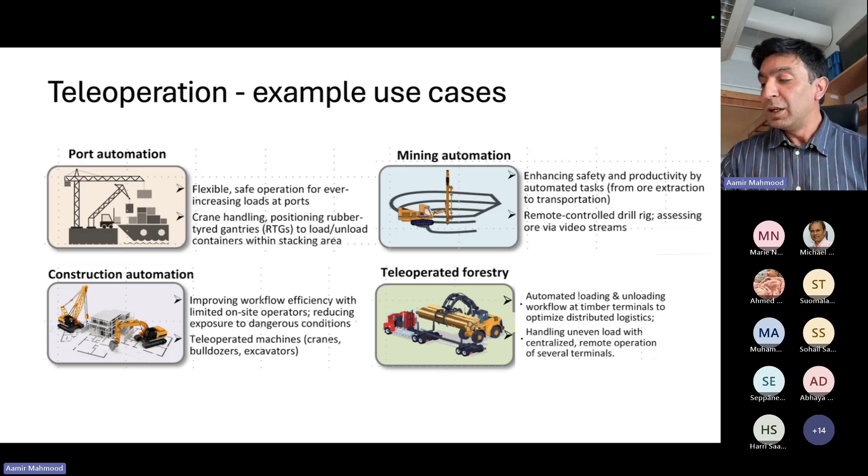And then the forest industry, it covers a wide area. So I stole this slide because SCA was the project partner. And when we're talking about why even this—

Starlink, for example, why they don't have connectivity in the northern areas. So probably what we see is that we need to advocate for the connectivity needs in these areas.

Here it shows on the left side the forest that is owned by SCA. I'm putting Sundsvall here as a reference because they own the forest in the northern part of Sweden. On the right side, it's the different operations happening because SCA owns the forest and maintains it—it's not only about cutting the wood, but also maintaining it, preparing the soil and planting new trees. All these activities are happening in the northern areas.

So in this case, where the wood is felled—they cut the wood and then it's transported to some terminal, some intermediate point where the wood is stored. Where the wood is cut, usually they have one harvesting machine and one forwarding machine that loads the raw wood onto trucks, and then it's transported to some intermediate location, which they call the timber terminal—that's where it is stored. They have around 200 sites where these actions are happening continuously.

So far it's operated manually, but in future they just want to report what logging operation is happening at this moment at this site, and get the next task—okay, now they should move to this site. So currently they are talking about coverage needs, but in future they want to automate that operation—the ability to operate the machines from a remote location, because manning these sites is always difficult and challenging.

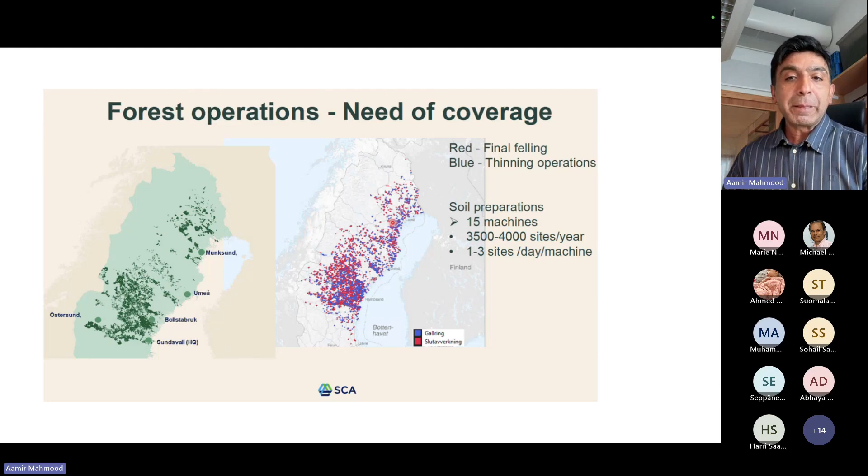In this first project, the remote timber project, we were focusing mainly on wood coming from the forest and transported. When it comes to this timber terminal, they have 15 sites in this northern part, but in general in Sweden there are more than 100 sites where timber terminals store wood before it's forwarded to the industry or factories. The objective was that when the wood arrives, these heavy wheel loaders, about 40-ton wheel loaders, would be operated from a remote location.

It's the automation of this workflow for loading and unloading. If we have one operator sitting at a remote location, they have the ability to operate four timber terminals, covering the manning needs of these terminals. Mostly they are in remote locations, so manning of these timber terminals is a bit challenging.

If we talk about the teleoperation use case, it's challenging in terms of connectivity needs, because to operate this machine you need multiple views. This machine isn't just about driving; it has to do intricate operations like handling the wood, loading and unloading, and storing it in the right place. So it's an uplink-heavy use case in terms of video transmission that the machine has to send to the operator at the remote location. Lack of connectivity infrastructure and fulfilling the demanding connectivity needs of this use case is challenging.

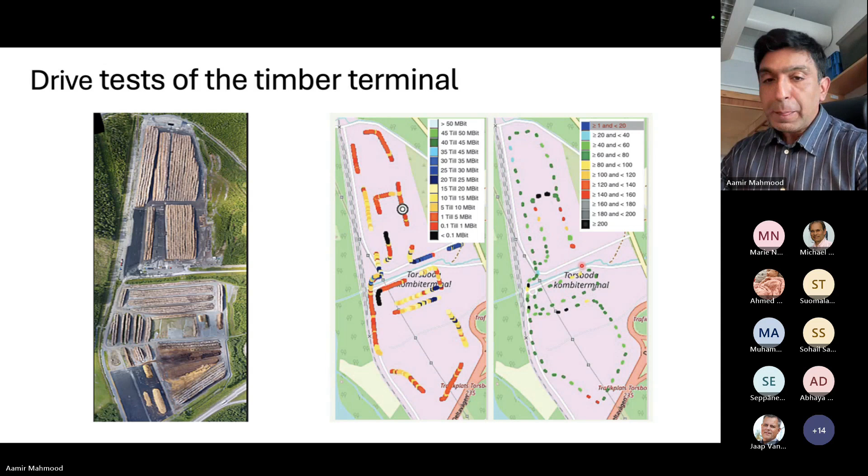So in that case, we went towards selecting a certain section within this timber terminal and installing a dedicated base station there, just to provide coverage in this area.

This was our test area where the heavy loader vehicle was operating. The operator was at the same location, but the traffic was routed through Stockholm, since the core is in Stockholm, so traffic was routed there and back to the operator. The base station was maintaining two sectors, one towards the vehicle and one towards the operator.

This is where the vehicle is operating, and the timber height could reach up to 10 to 15 meters. For the operator, this was the analysis that was done.

To have the operator work in this kind of environment, we needed to determine how many views he needs to operate this machine comfortably. There were 11 cameras installed on the vehicle, with a proprietary tool stitching all these streams together, transmitting them, and then they're received by the operator.

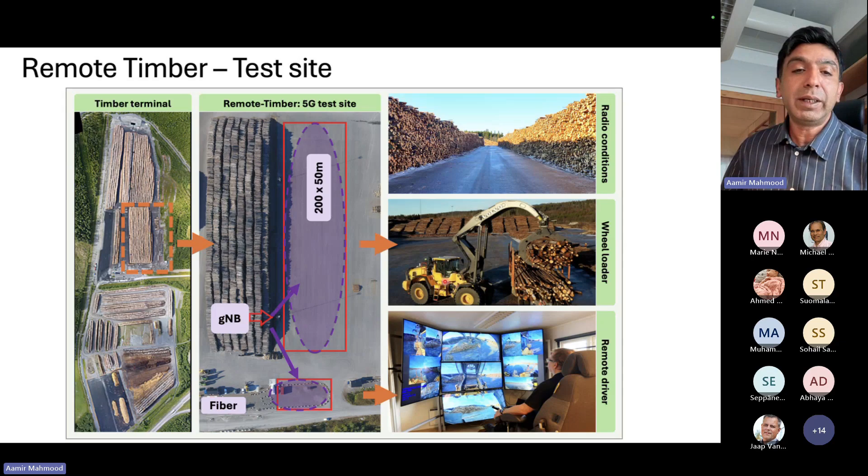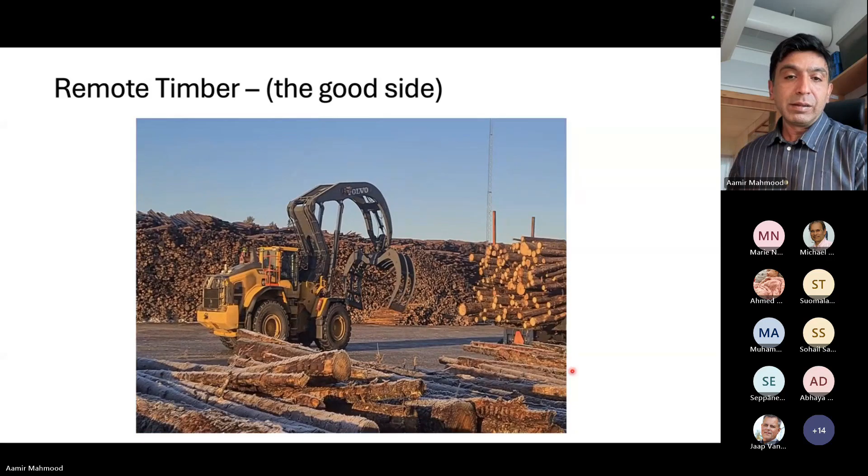In this case, the drivers needed certain training before because they lack certain haptic feedback that was not provided. A lot of things they judge based on how the vehicle is behaving when they lift the load, or there's no sound, nothing. So they needed some training, but they wish they could have the vibrations that they feel when they are really operating that machine. But after certain training, they were able to handle these operations.

The other difficult task was this depth estimation when you are loading or unloading. These certain boundaries, it's hard to guess. The depth estimation is difficult.

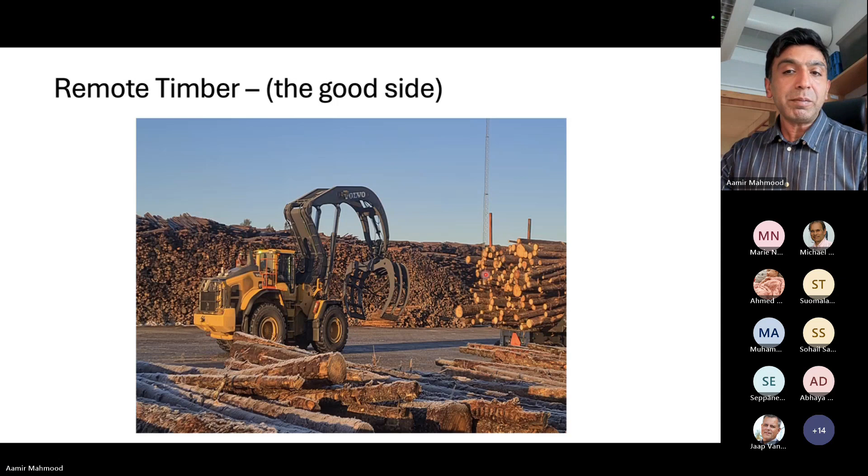So if we look at how the network was configured, it was a lot of overprovisioning of the radio resources - 1800 megahertz band was allocated, 1900 megahertz band as well as 3.5 gigahertz with TDD with certain uplink downlink distribution of resources. With this overprovisioning of resources, how feasible is that from the operator perspective, or from the end user, the SCA in this case? How to allocate these resources in an efficient way - that's still challenging. And as we move out of this coverage zone, the performance degrades quickly.

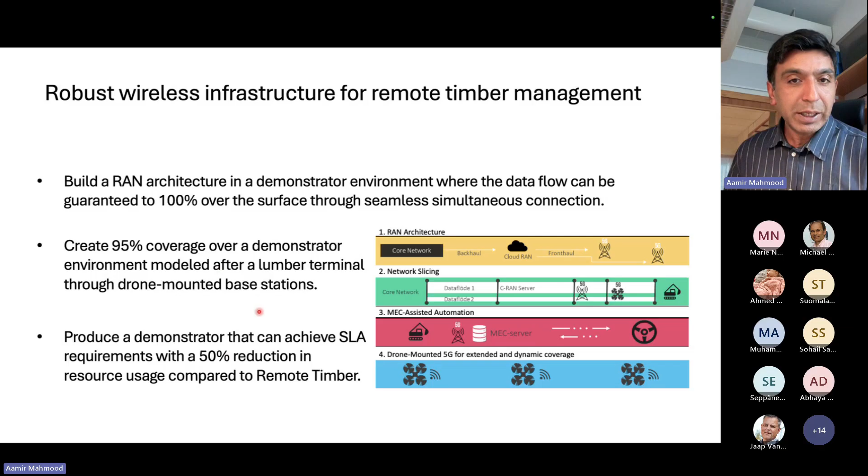To provide different coverage options, we had two options. Either we have a local core and a flying base station on a drone that provides connectivity and fulfills coverage holes in that timber terminal. The other option, coming from SCA, was to lift up the drone so the tower comes into visible range, acting like a typical UE.

It's more like a UE with coverage and connectivity to the base station, and then access could be either 5G or Wi-Fi. The one we demonstrated was in Västerås. In that case we had a local core - it was not 5G core, it was 4G core provided by Ericsson, tested in a lot of different situations, so they didn't go towards a 5G setup. We had the drone-mounted base station.

I'll show the demo later, but the forwarding machine was used to test the connectivity. In parallel, we did additional tests - instead of ping, we used TWAMP, the two-way active measurement protocol, which allows generating different traffic patterns and payloads, making it more appropriate than pings for measuring network performance.

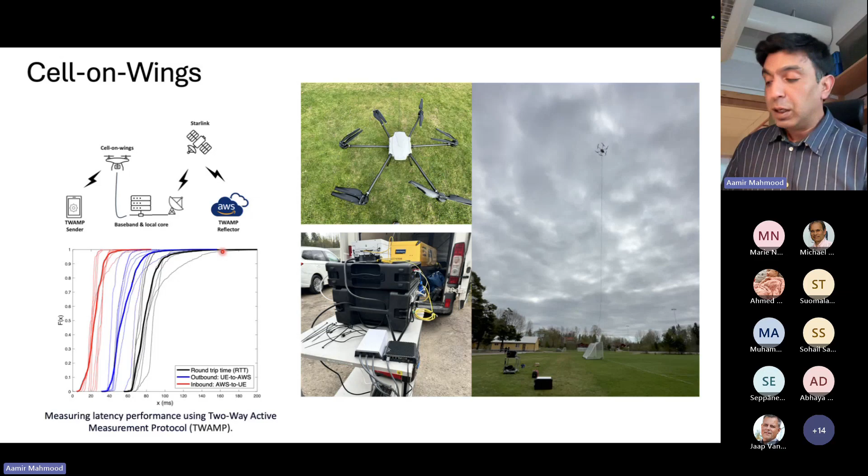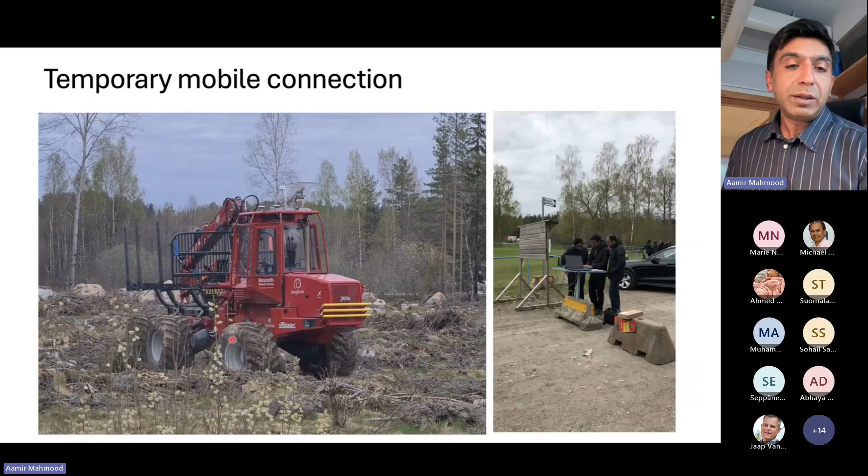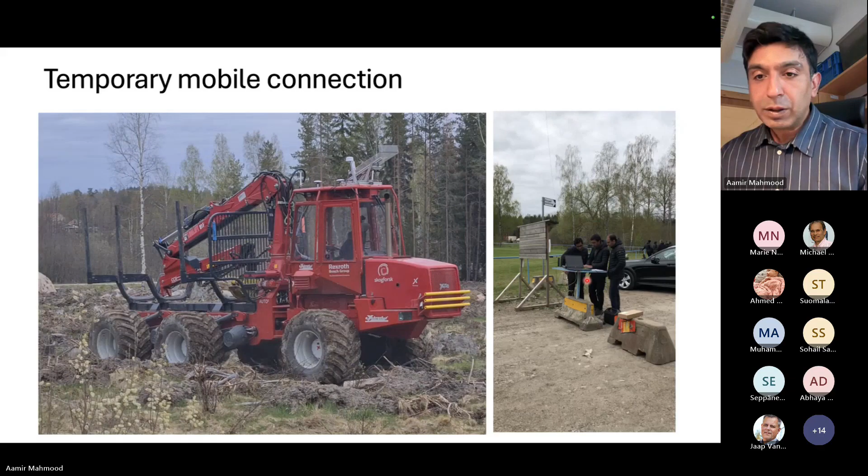The forwarding machine was operated remotely from Uppsala - I forgot the exact distance between Västerås and Uppsala, but it's 80, 90 kilometers or so. The drone was flying above with the base station, around 30 to 40 meters up, and it was providing coverage of around 3 to 4 kilometers.

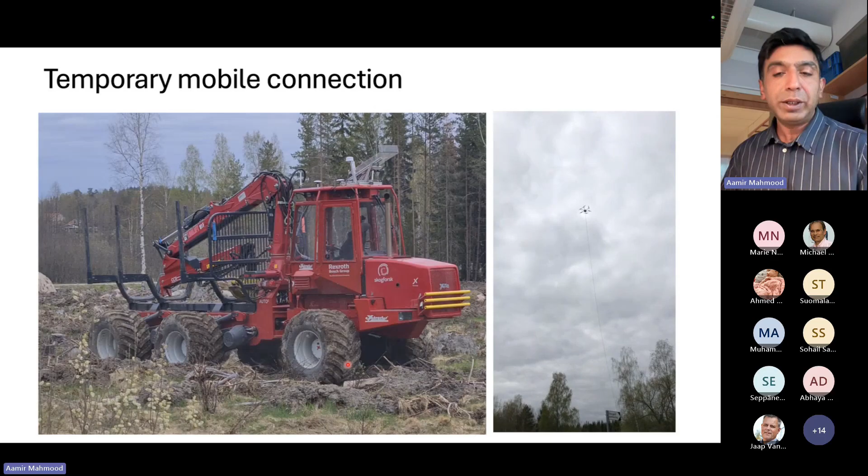This project is still continuing. So this project is continuing, and we are looking at the role of MEC to reduce the uplink information transfer.

We are looking at super resolution algorithms to reduce data rates and compress videos. This is what we see for the future - as Nurul already mentioned, multi-modal data fusion, where instead of giving raw information, we rather need more abstraction of the details provided to the operator to operate this machine.

The challenge is that it's not only about the driving itself - we also need to build an environment model, a driving model, as well as a task model, which covers the actual loading and unloading operations.